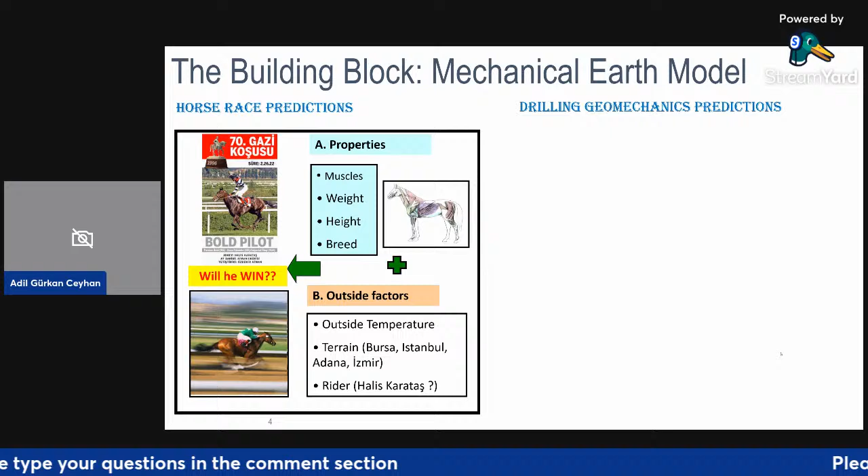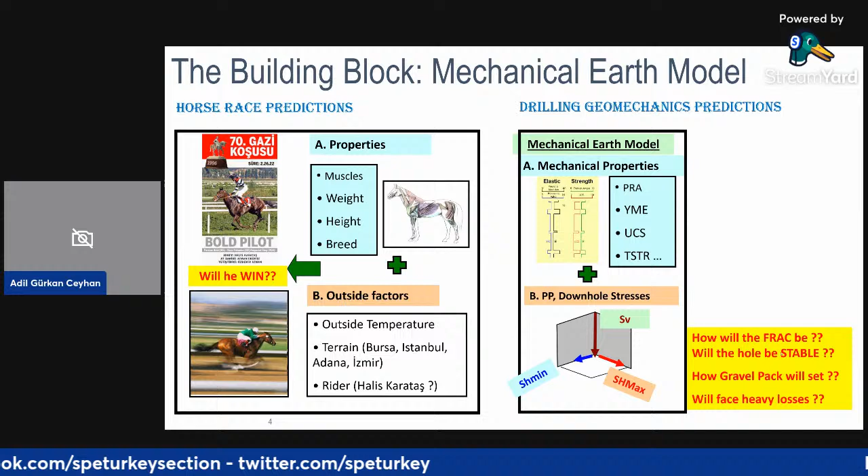First, we have to define the mechanical properties of a given well location, and of course we have outside factors such as pore pressure and downhole stresses like vertical stress and minimum and maximum horizontal stress. With that, once you have a complete mechanical earth model - this can be 1D - eventually we want to reach that 3D model. You can define the frac design, give guidance for the drillers, define a gravel pack operation, and give a heads up for potential loss locations before drilling commences.

So when you put it all together, there are several things that need to be considered for the mechanical earth model. Firstly, we have the critical input data such as wireline logs and the seismic cubes, and we must also have the core data as well as drilling information. When we talk about wireline logs, the critical ones are the acoustic or sonic logs, and density and porosity logs are also critical inputs.

And of course, when you want to define mechanical properties, you have to define the Young's modulus, Poisson's ratio, friction angles, and other parameters - I'll come to those details in coming slides. And of course you need to calibrate and model the vertical stress. There is a way you can also model SH min, the horizontal minimum stress, but there is no direct way to measure SH max, the horizontal maximum stress.

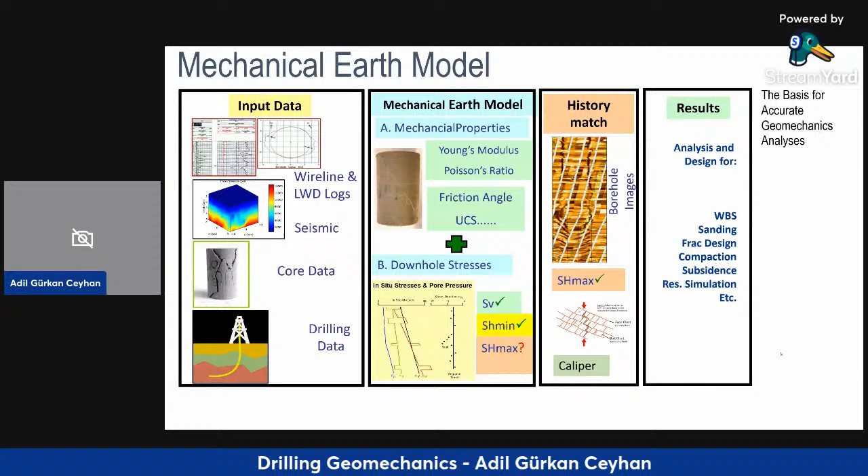But you can infer it from history matching of the caliper data, which today's software is capable of. You do the history match to understand SH max. Also, the direction of SH max is really critical, determined from image data and caliper information. Then, of course, you can design wellbore stability with this information. You can do sanding analysis, frac design, compaction, subsidence, and reservoir simulation - if you do coupled studies, this will be the critical input for those studies.

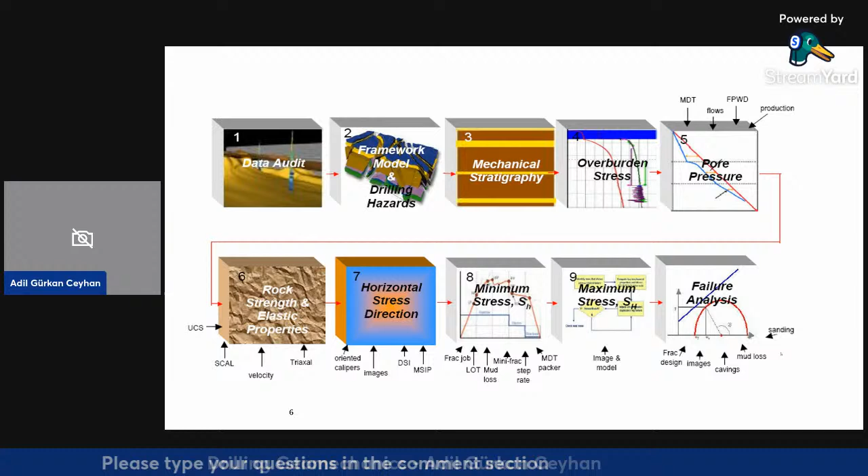So when we talk about 1D, a simple 1D mechanical model, first you start with the data audit. Then this data audit goes through a framework model to understand the geology and the potential drilling hazards if you have offset well studies, and then you start creating the mechanical stratigraphy based on this, and then from the offset well density logs you also create the overburden stress.

That's the first primary stress that we need to really get right first. If you don't get the overburden right, you have all sorts of complications. That's why every step has its own critical weight, but overburden stress is a must-have - it needs to be correct at the beginning. Then, of course, the pore pressure.

Today we are capable of measuring pore pressure in the drilled well. Also, while drilling we can take formation pressure tests as well. And if you have some flows happen during drilling, that gives you well control issues, but it also gives you pore pressure information. Of course, nearby well production also gives you an idea about the pore pressures.

Then you come up to the rock strength and elastic properties. So then you involve the uniaxial compressive strength and the triaxial core studies, and of course the velocity input, velocity inversions. Then you model your strength and elastic properties.

Then again, horizontal stress direction - as I mentioned earlier, oriented calipers, images, and acoustic data will help you understand stress azimuth, if there is any preference for the maximum stress direction.

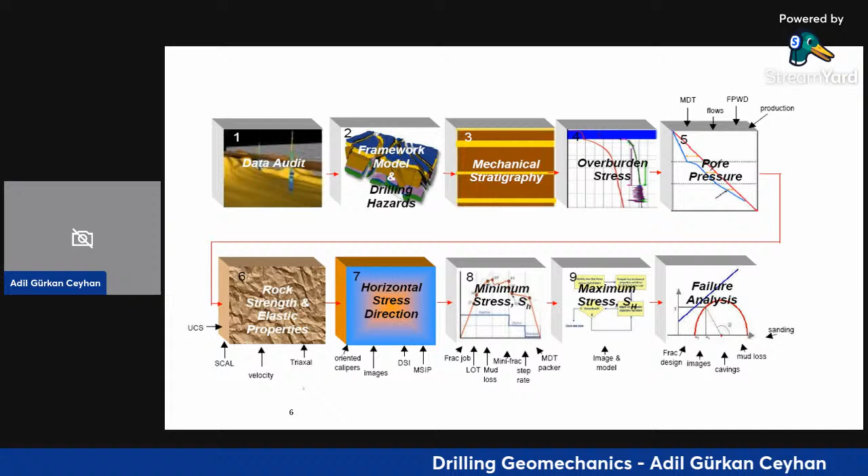Then you go back and do the Mohr-Coulomb type failure analysis, like cavings, mud losses, and if you have sanding information coming from nearby wells, you can also understand that to model the failure prediction for the environment. So as a small cartoon, it's from the 1D mechanical model generated.

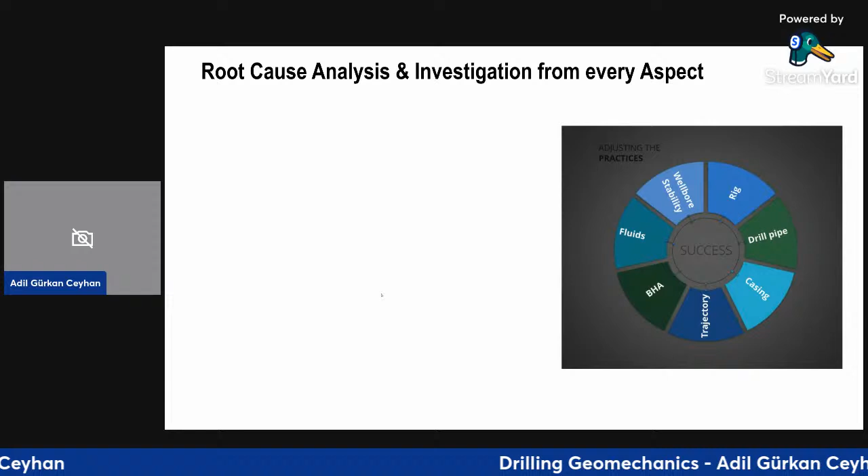So every aspect, of course, we talk about wellbore stability. There are things that sometimes you cannot control, or you can control if you plan in advance, like the rig type and drill pipe casings, trajectory, bottom hole assemblies, and of course the drilling fluids, right? Those are also the critical parts, to avoid having a washed out or badly washed out wellbore. So if you look at the root cause, there could be several of them, and it could be a mix.

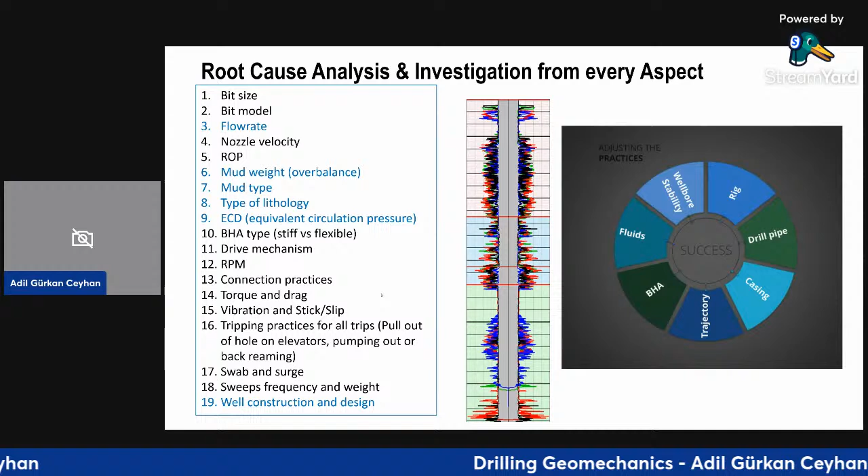So today, basically, we're going to focus on the overbalance and the type of lithology, and of course the ECD. But other things like selecting the bits, ROPs, and other types of drilling activities have a critical impact on drilling geomechanics, right?

So that's why, once you have these external factors which you cannot control directly, those could be on the left side, I just put it here. So what you need is a certain mindset, and some calculations and certain practices need to be involved in this type of analysis. Not only just the modeling with the software, but you also need to apply these practices, and see how you're going to collaborate with the field people, and also collaborate with the asset team at the same time.

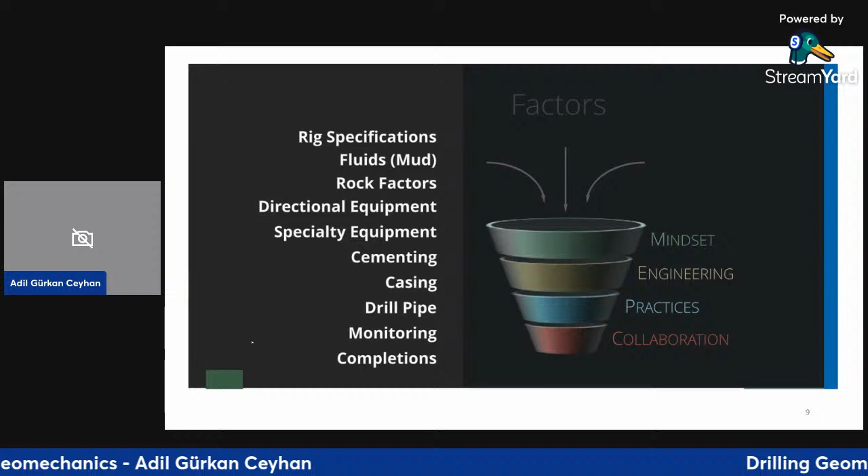So in a sense, the geomechanics engineers or geomechanics team, it's like the interface between the drilling and subsurface. So you make that interface.

But when you talk about measurement, it can be maybe, right? So always you talk about maybe. This brings up the maybe question always when you do the analysis. And of course, the question you should always ask yourself: okay, they have the KPI on shoe to shoe time targets, but how do you define the KPI for measurements? This is always something you need to think about.

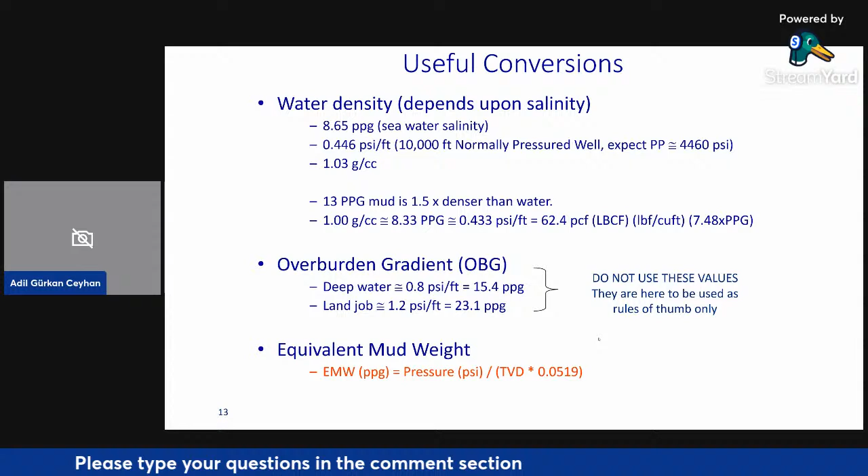And of course you can convert the equivalent mud weight always to pressure, which is simply you have the TVD and a multiplication factor of 0.052. As I mentioned, drillers like to always talk about equivalent mud weight when they refer to anything in the well. So since you're producing something on pressure, you always need to convert this into equivalent mud weight, which is either ppg or pcf.

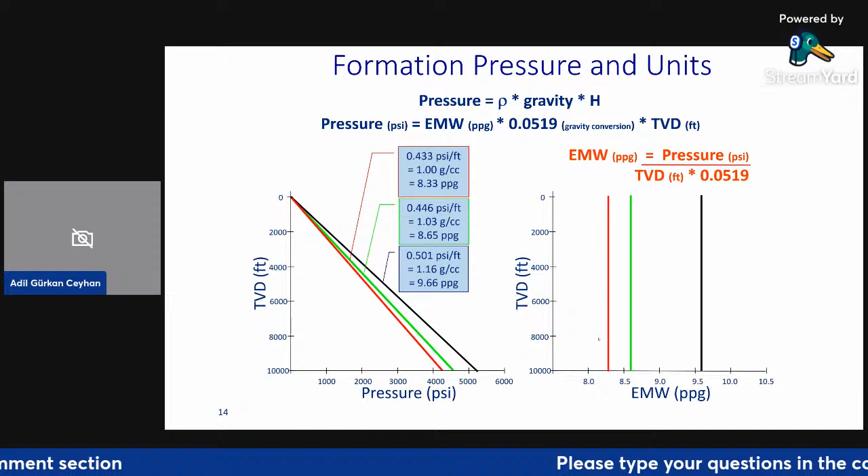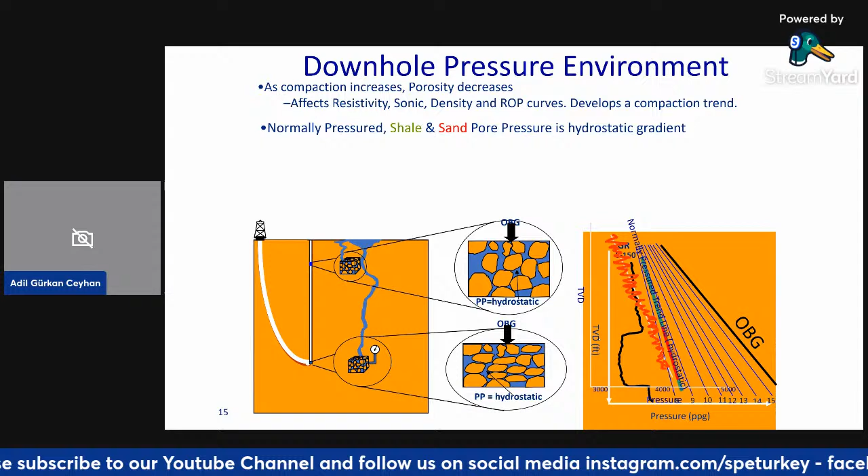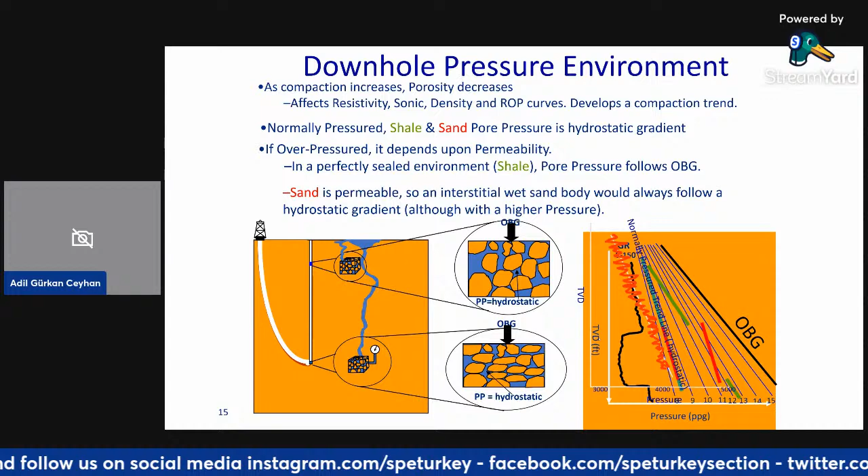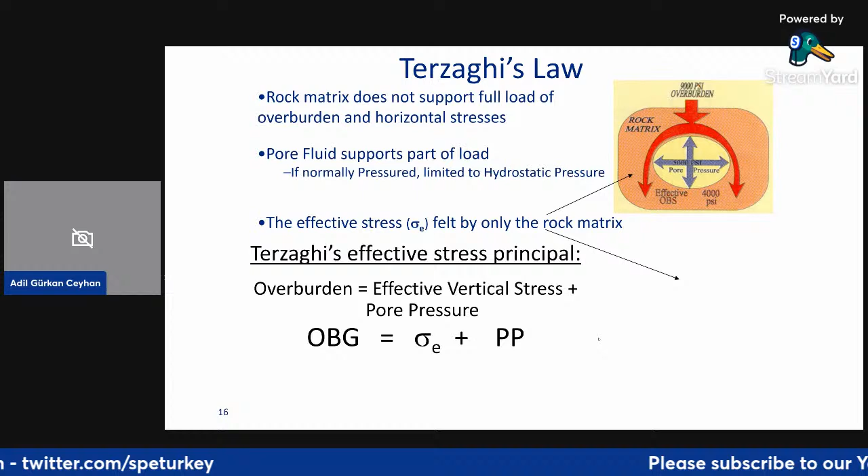But going back to the past, Terzaghi first really understood this. Terzaghi is an interesting character because he spent some time in Istanbul during the First World War as part of the deal with the Austro-Hungarian Empire and the Ottoman Empire. He also taught people in Istanbul Technical University as well as Bosphorus University at that time. But then he did some studies and understood that the rock matrix does not support the full load of overburden and horizontal stress.

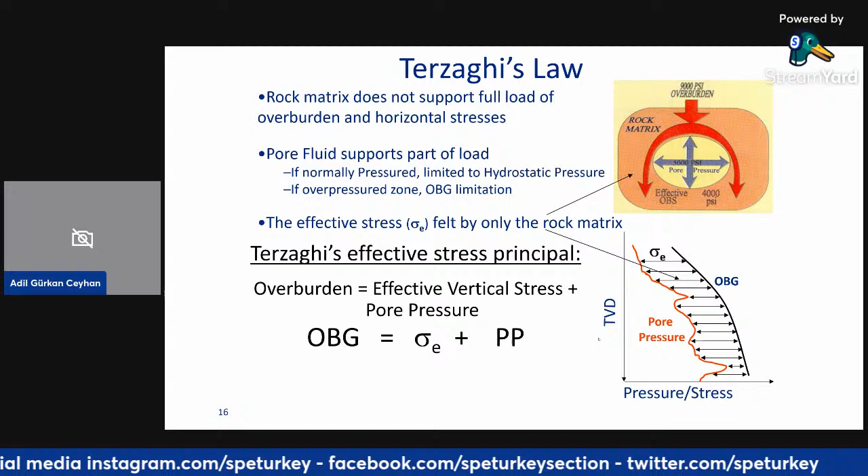It calibrates with itself as the effective stress. So basically you have the overburden gradient, but the rock itself only feels the effective stress, which is overburden minus the pore pressure. Any pore pressure method developed afterwards, like Eaton or Bowers, is basically simply trying to find that effective stress term. Once you know your overburden gradient, you can simply subtract, and then obtain the pore pressure trends.

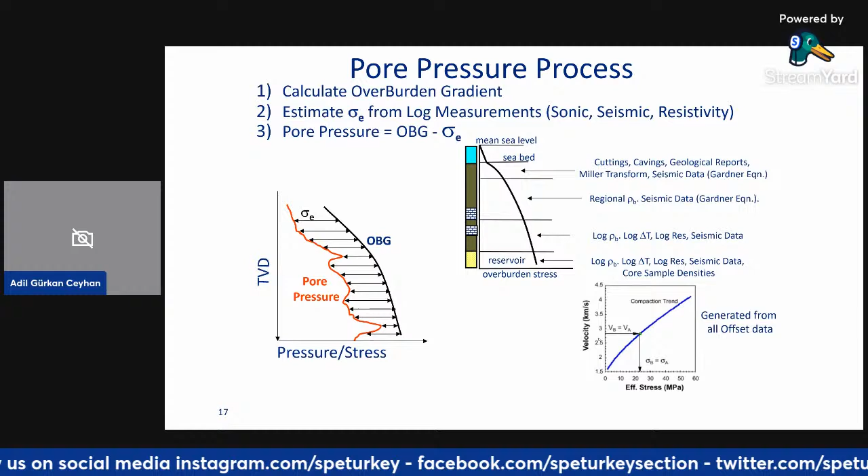Again, the first step is you need to get the overburden gradient - this is very important. We call it S vertical, sometimes overburden gradient. You can do this with density logs, with some seismic as well. There are correlations available, and you can estimate based on given locations with changes in velocity. You can see if the trend is changing, especially on a logarithmic scale, the slowness, which we call DTCO, sonic slowness. You can calibrate this and estimate the changes in effective stress, and then simply start assuming your pore pressure.

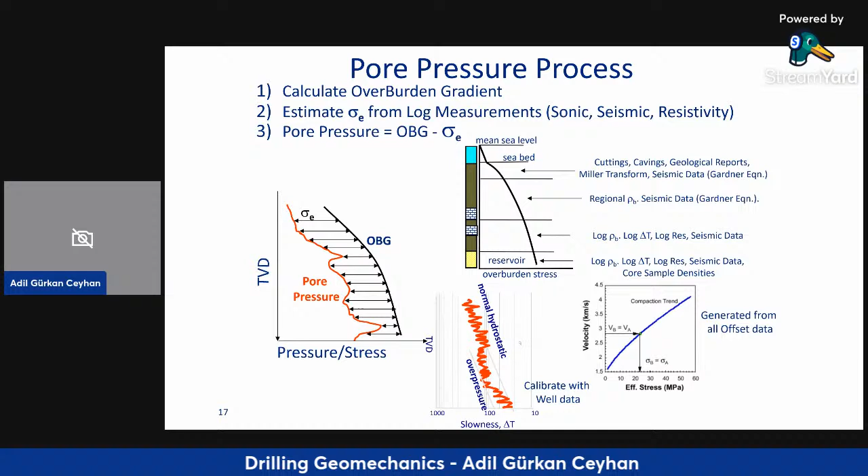So basically, if you have normal compaction trends, porosity starts at the surface around 50%, and with the normal compaction trend, the porosity decreases. Normally, if you have a single compaction line, your life is easy. You can make easy correlations.

But if multiple compaction lines come into play, pore pressure modeling becomes rather complicated, and sometimes really difficult. That's why you need additional measurements, especially if you are dealing with a wildcat in offshore.

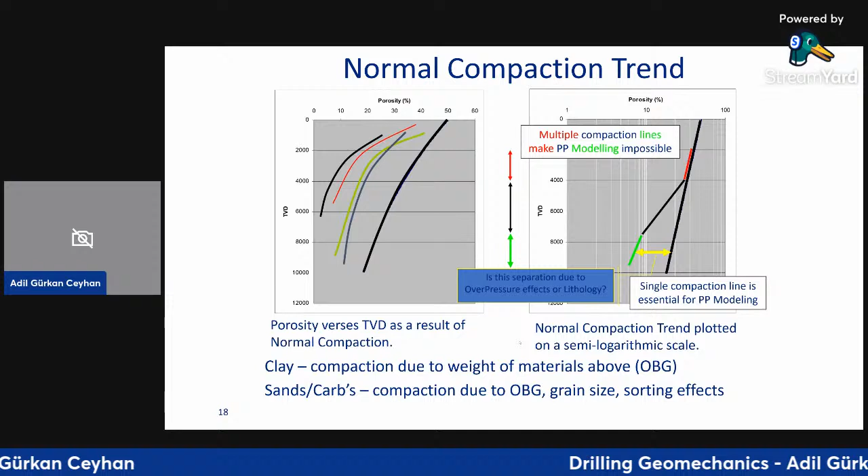So let's go back and check based on porosity change, overpressure related to porosity, we have normal pressure with the normal trend line. Of course, we have faster deposition, and pressure doesn't have enough time to equilibrate with the above and below, so the porosity stays and creates an overpressure region.

And if you look at the other logs, this can be a porosity log if you are measuring, or as I mentioned earlier, slowness with delta T, or resistivity logs - you can also do those effects.

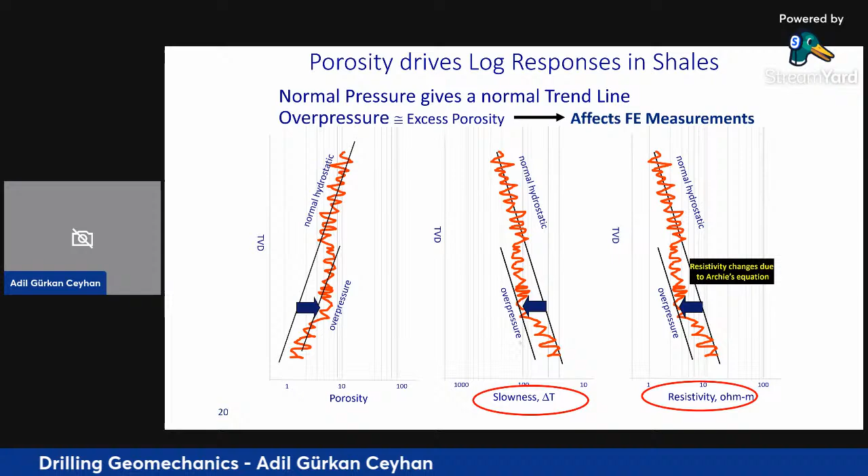Of course, you need to understand that you are only applying this across the shale, because the trend application on the sand, if you are going through the sand, it doesn't really work. So make sure you really understand that trend change over the shale intervals.

And also what drillers do, they have the D-exponent values. They utilize ROP, RPM, weight on bit, and bit size. A change in trend gives you the anomaly that you are potentially going through a pressure ramp.

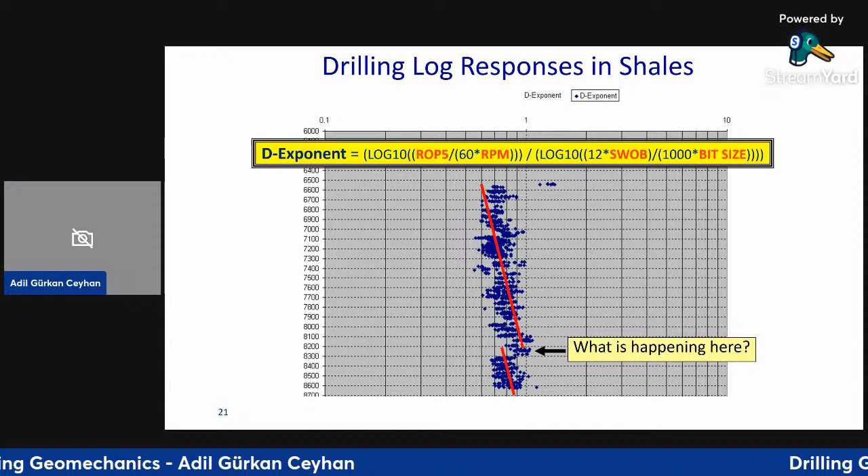But again, this is developed for the roller cone bits. It doesn't really apply to the diamond bits that you are using now commonly in almost all environments. But this is an option again - try to utilize it with the drilling parameters.

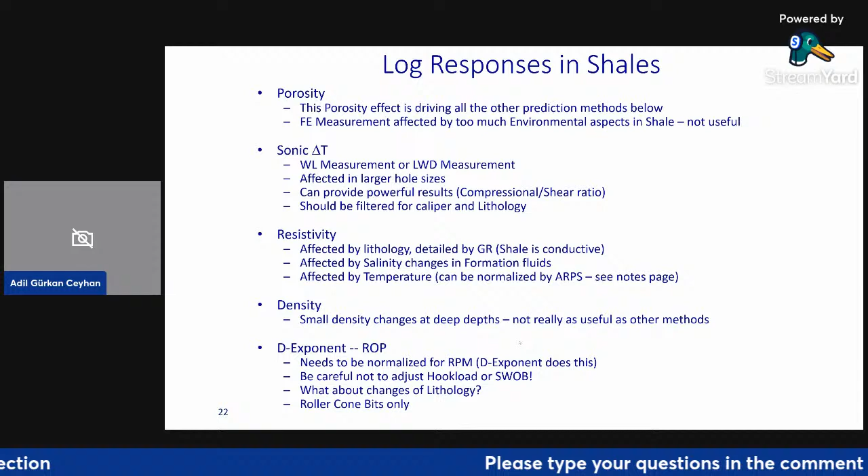Simply we have the porosity methods, the sonic methods, resistivity, density, and then mentioned the D-exponent. But the most effective one is becoming the sonic delta T, which you can easily correlate and is rather not affected by lithology. You can see the sonic trends and do pressure estimates based on sonic data. So today we are utilizing this mainly in offshore with real-time LWD information.

So when it comes to vertical stress, as I earlier mentioned, it's very critical. You are in offshore, you have a certain density log measured on a certain interval, but then from the mud line, the bottom of the sea, up to the sea level, you need to assume something.

So normally there are correlations, you do extrapolation, but this gives you question marks if there is a heterogeneous environment in that overburden interval - it complicates the S vertical calculation. But if you don't have anything else, you need to do this extrapolation and use this as the overburden gradient for your calculations.

And for modeling horizontal stress, we have an empirical correlation that's been developed mainly for the Gulf of Mexico, that is now used and also published in so many different books and papers.

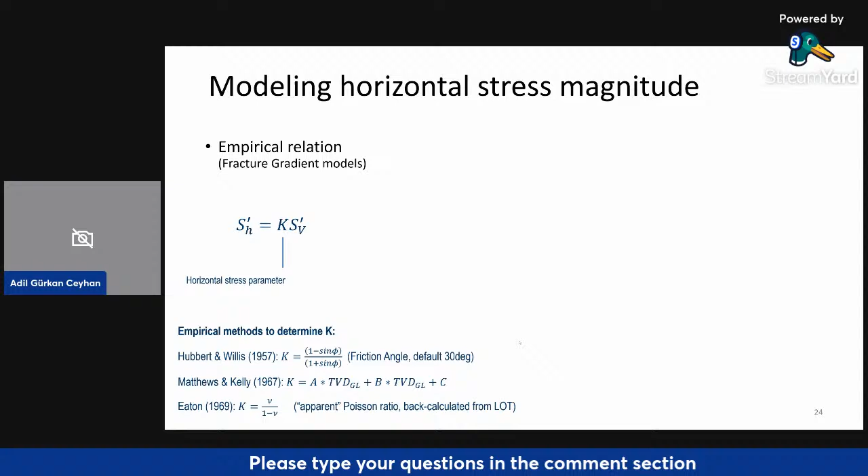Then they relate the effective SH min and effective S vertical with the K factor. That empirical method's K factor has also been slightly modified over the years. And lately, they also find the relation with the Poisson ratio, which I will explain in a bit, and back calculate from the leak-off tests.

And simply we have Hooke's law again. This is a bit of a later application, but today software is capable of utilizing the tectonic strain parameters, which is the epsilon parameters. That's what we are utilizing to understand SH min, SH max when you calibrate with caliper and other information, along with leak-off tests.

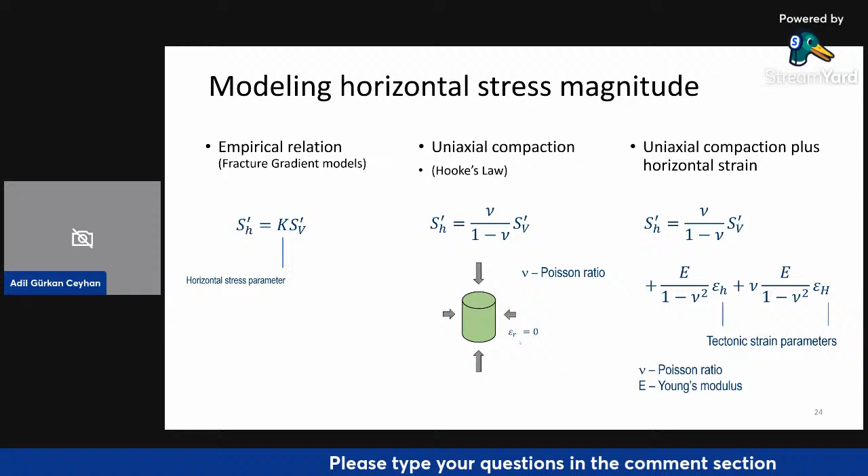Of course, here we need to define Poisson ratio and Young's modulus. What are those? Simply, those are the elastic properties. I'm sure you've heard about this several times. But what are these? Poisson ratio is basically the measure of lateral expansion versus longitudinal contraction.

A very good example is a bottle cork. So guess what - when you're opening that bottle, you are applying pressure from both sides, but there you don't see longitudinal contraction.

Then of course, you can refer that cork has a Poisson ratio of almost zero. This is a dimensionless parameter. It can be from 0.1 to 0.5 for rocks, but cork is one of the good examples.

Young modulus is the ratio of applied stress and the resultant strain in the same direction. It can be thought of as the stiffness of the rock. Of course, Young modulus we can calculate from the logs, and we can also measure in the lab, which I will come to in a bit. But once you calculate from the logs, you get the dynamic parameters, and you have to convert this to static. That's why when I refer to YME_STA, it means Young modulus static, Poisson ratio static. Those go into your calculations for understanding the stress.

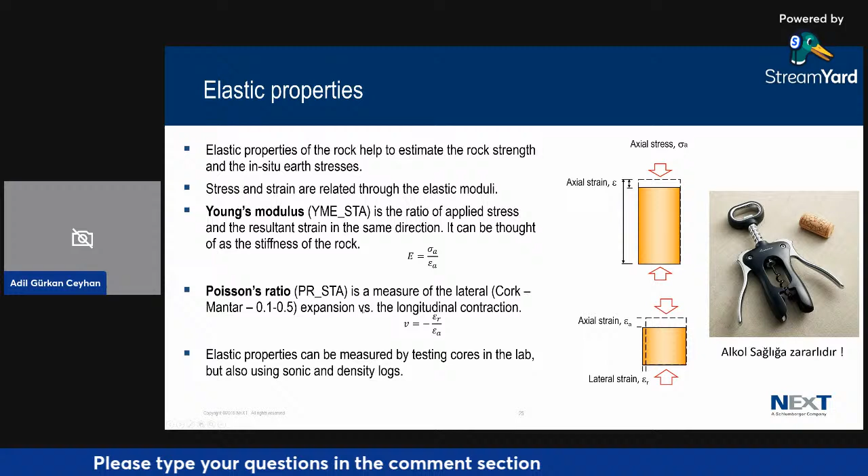Let's look at some examples, the pore pressure and the fracture gradient cases.

One of the things is that we are mainly dealing with primary under compaction and simple tectonics, but you also need to think about secondary trap mechanisms, clay diagenesis, hydrocarbon maturation, and charging from several sites. Also laterals, up-dip reservoir pressure, lateral transfer creates the secondary mechanism. To understand those is not that easy with simple 1D velocity models. But still, with the primary under compaction disequilibrium, you can understand that from 1D models and 1D approaches.

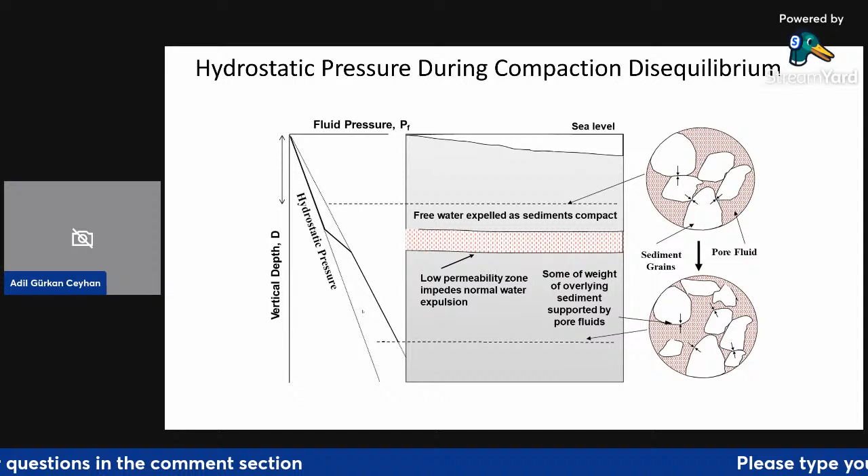Just to add, when you have the hydrostatic pressure during compaction disequilibrium, you have the normal hydrostatic pressure gradient with the relation to vertical depth, TVD. If you have a low permeability barrier, as I mentioned earlier, then with the compaction, speed exceeds that pressure equilibrium and it doesn't equilibrate above and below, and then you end up having some high pressure trend below that impermeable barrier. So this creates the importance of clays.

Clay bearing sediment makes up roughly 80% of the geological column. Today, if you look at the Black Sea, the majority of that is really filled with clays. Understanding clays in terms of seal or maybe source rock, and also compaction trends, diagenesis, serve as one of the critical inputs for understanding abnormal pore pressure. Again, clay properties, clay modeling across that region, is very critical to understand how the basin behaves with the pore pressure.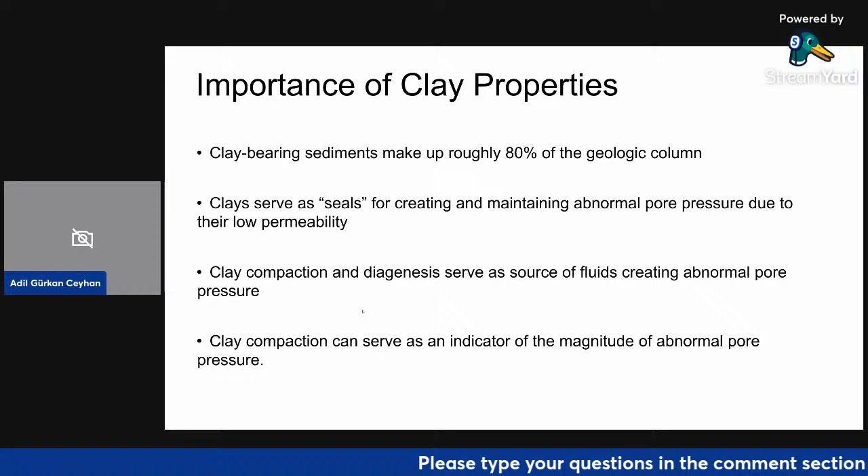Moving on, relative stress magnitudes, we have three types of faulting. As you know, especially with a geology background, we have normal faulting, strike slip, and thrust faulting. When you talk about the North Anatolian fault, or Anadolu in general, or the Adıyaman, Batman region, and in a sense maybe a portion of the Akdeniz basin, you have that very faulted area, and really strike slip tendency controls the trends. But when you come to the Black Sea, you are far away from all the tectonic activities. Then you are really on a normal faulting regime, where S vertical is the primary, the highest stress.

So as I mentioned earlier, horizontal stress cannot be evaluated directly. You need to do a leak-off test to understand the trends. What the leak-off test actually is: you drill a fresh formation after setting a casing. This could be 3 to 4 meters. Then you start pressurizing the wellbore from the top with casing plus the freshly drilled formation.

Then first you reach what we call FIT, the first gradual point. This is what we call the formation integrity test. So if you're not sure that your formation is going to behave and give you a good rate, you can also stop here with the FIT. But if you want to continue to understand the leak off area, then this starts to deviate. Of course, you are plotting pressure versus volume, not pressure versus time, to get everything right, and to normalize for other effects.

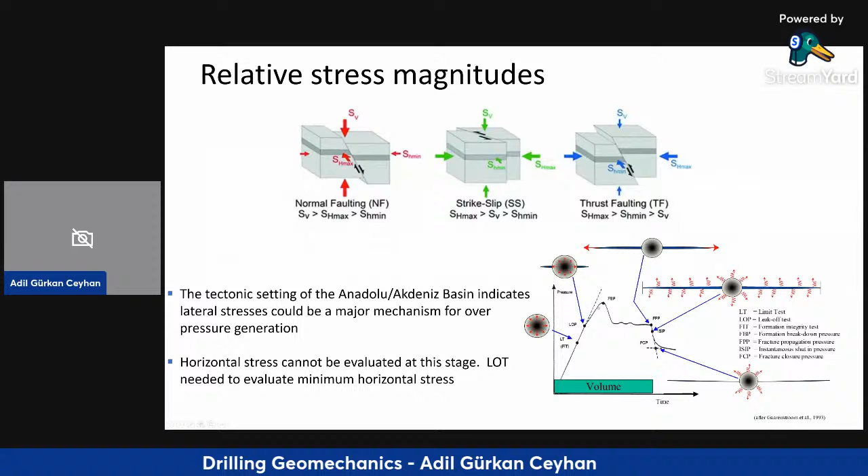So basically, normally we do this with the mini frac operation. But for the casing, we normally leave it at the leak off trend. Once you see the leak off, then you stop, and you know your leak off trend.

So with the petrophysical response, we have resistivity, which will give an anomaly if you pass through an overpressure trend, and it will change direction. Of course, normally what we have here with the seismic input is the vertical velocity profile, given in meter per second. You can also convert this to 1 over velocity to get delta t, which you can use easily in microsecond over feet. This is basically when you do logs, we get this log with the acoustic tools, and you have also the trend at the same time. Then if you have density measurements, similarly, the density also creates that anomaly with the overpressure trend.

So let's look at an example. This is Well A. It's a wildcat, with offsets maybe at a distance of 60 to 70 kilometers offshore. We've given velocity profiles that could be high and low. There are two curves, but just look at this: with the high curve, we divided it into A, B, C, and D, and this is the expected lithology column.

So here A is velocity increase with depth, which is normal pressure expected. B is velocity constant with depth, a perfect seal condition, increasing at the same rate. So we expect the pore pressure will increase here on B at the same rate as the overburden, since we are only in the clay, not exposed to the sands.

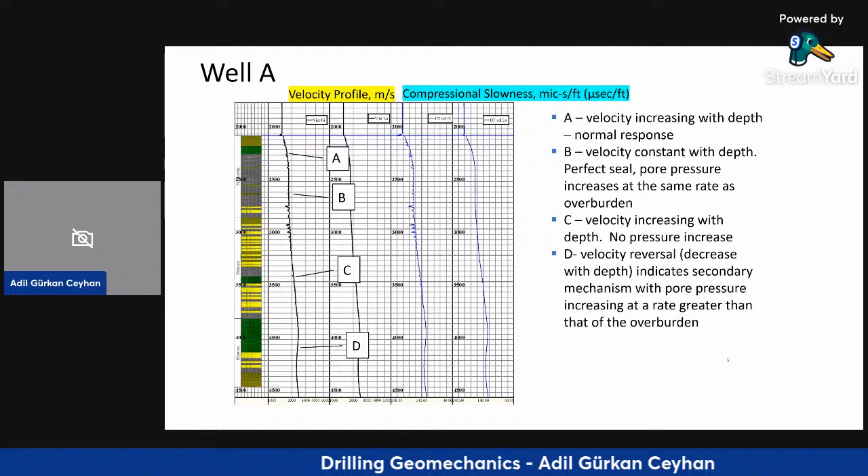Then on D, of course, you see a velocity reversal. So any velocity reversal you see from the seismic gives you a hint that you might be indicating that secondary mechanism with the pore pressure, which might indicate some relative pore pressure increase.

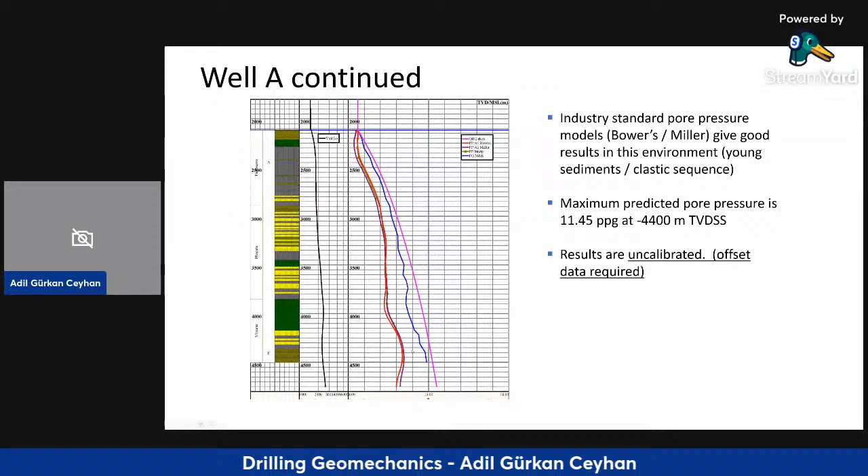So moving on, with some engineering judgment, you do this and create that pore pressure model. First you do your overburden gradient, shown here in pink, and the blue is the frac gradient, which comes from the Matthews and Kelly approach. Then you have two curves here, minimum and maximum pore pressure curve you can obtain, and then you define the mud weight window.

Then, of course, one of the other critical inputs is the temperature. You need to take into consideration that temperature also has an impact if you have clay types like smectite and illite diagenesis, especially expected in the C region. Then some of the density and sonic acoustic logs will also give you an idea while drilling those formations.

So you include this also into the modeling, and you create your pore pressure window. As you can see here, it's a rather narrow drilling window, typical of a geopressured offshore well. There's one section here where you have maybe a single casing, but in several areas it's a question mark whether you can cross with maybe 1, 2, 3, 4, 5, 6 casing strings, or maybe use managed pressure drilling, which is maybe another subject for upcoming meetings. So here, it's a rather complicated well to drill, especially after this interval.

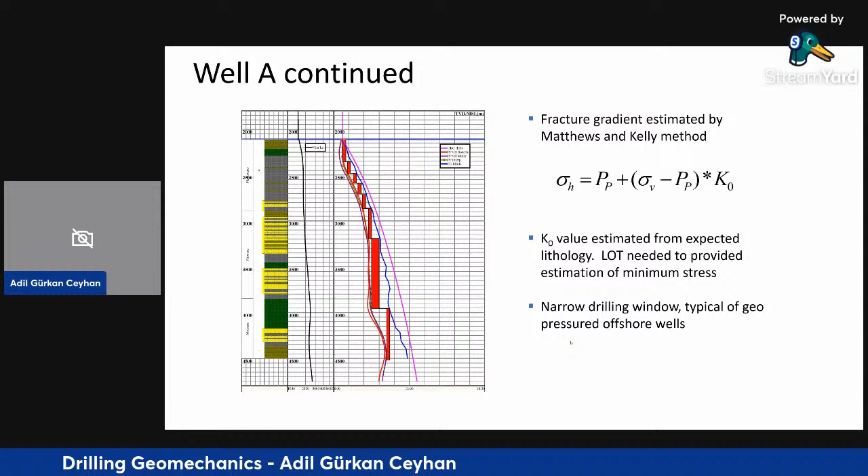Then below this, you have the 2 casing intervals, and you can complete this well. Again, here the minimum stress has been calculated based on correlations, since there are no logs available to calculate the Young's modulus and Poisson ratio. But there are cases where you might have that.

Same data set and it gives you 3 different outputs. Like here, this can easily give you an easy well to drill, to design the casing, or a challenging, or totally undrillable result, based on the assumptions you're using for the Eaton exponent. So that's why regional understanding and offset wells are critical.

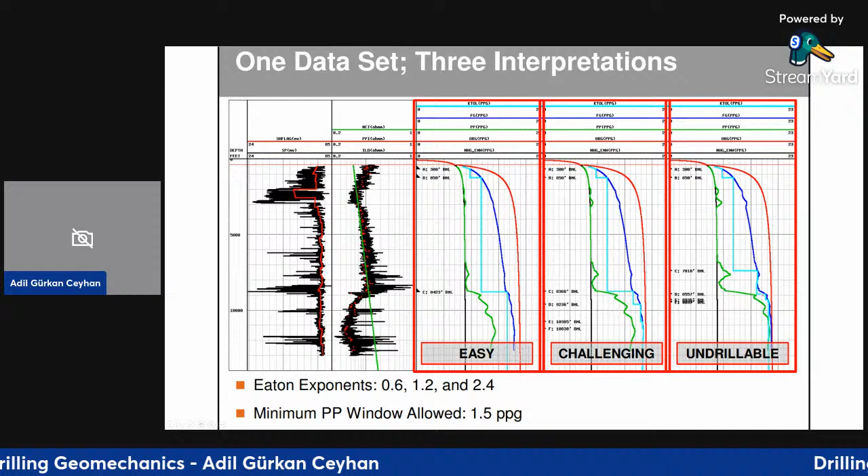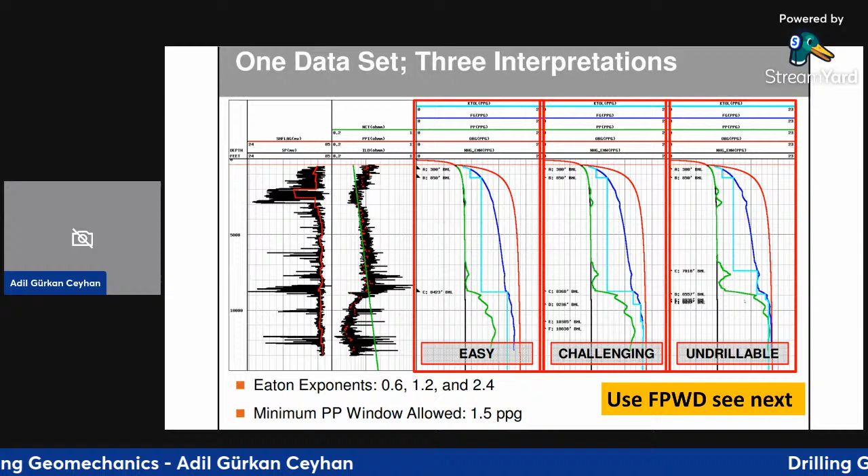So here, what you do, of course, if you have such a well where standard logs don't help you, then maybe you can utilize formation pressure while drilling to commence this operation. Then you can identify your pore pressure trends. I'll come and explain this FPWD in a bit also.

Just to the last slide - once you do pore pressure prediction, you are basically calibrating that model. I would say you are torturing the data, and some of those calibrations might really mislead you. That's why, especially for offshore drilling, when you do the models you have critical inputs from third parties. You work with several parties to define probable and good cases that you can model, for instance casing design for a deep water well.

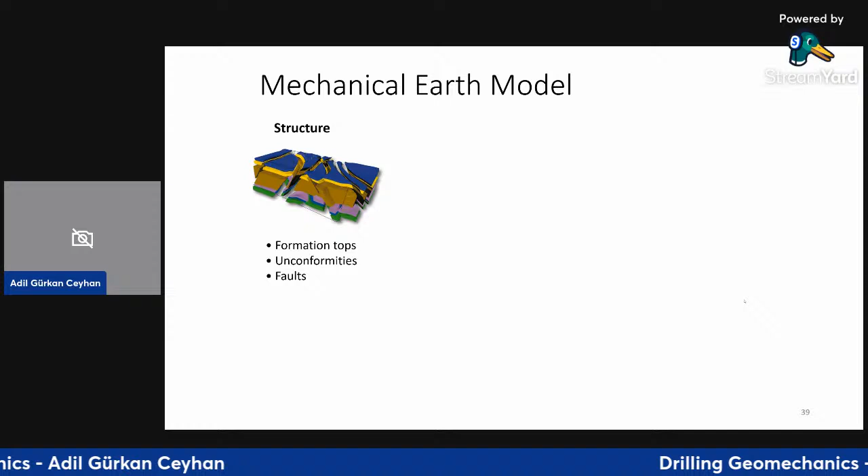Now let's look at wellbore stability after the pore pressure models. As I mentioned earlier, first we need formation tops, unconformities and faults with structural analysis. Then this goes to mechanical stratigraphy, where we do rock fabric mechanical supports and model selection. Then we come to Young's modulus, Poisson's ratio, friction angle, UCS, and stress calibration and stress direction, which completes the rock mechanical models.

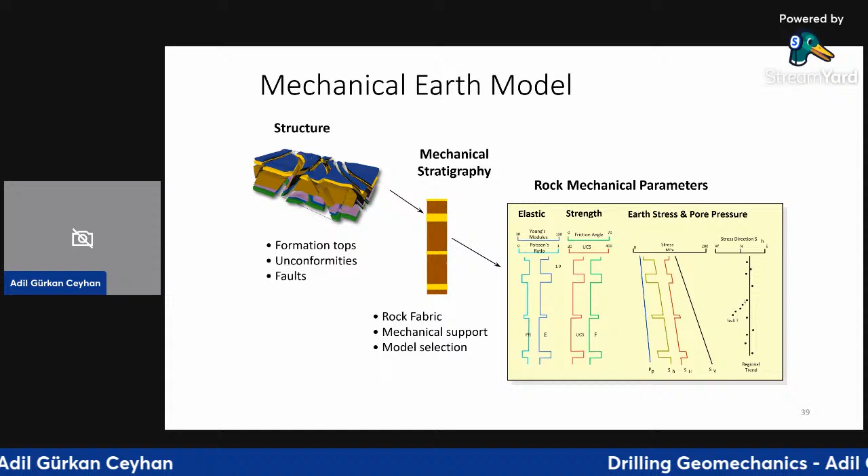With the 1D Earth model, vertical stress is critical, and then you need to reach minimum and maximum horizontal stress, pore pressure, rock strength, and friction angle again - those are the key parameters. You drive this versus true vertical depth.

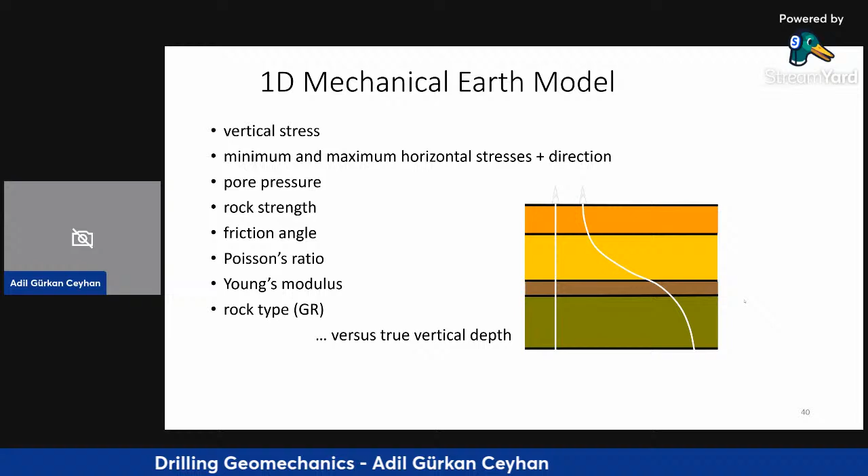When you do 2D mechanical models, you can include faults and structural dips. You can include these, but the stress is still not really equilibrated - you can allow that stress gradient to change laterally, and try to see that impact on the 2D mechanical earth models.

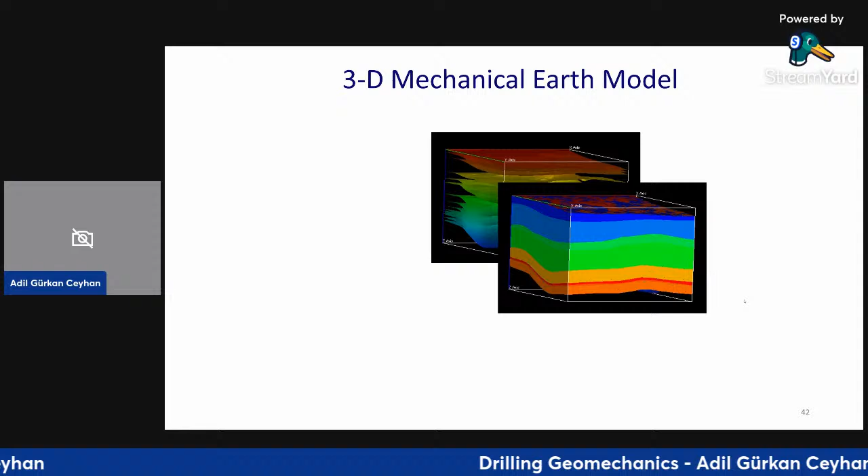But of course your ultimate goal is to reach 3D mechanical earth models. First you start with surfaces, then you have to fill the surfaces between with volume, then model the rock fabric in that volume. You may need some rock tests or additional logs once you add that model. Then you do the meshing, and try to reach that finite element approach for the 3D mechanical earth model - in this case fully equilibrated with the stress state.

Today there are several third-party softwares like Petrel Visage, Jewel, Gohfer, Elfen, FLAC 3D, used in the oil industry. They can utilize these approaches once they do the 3D models.

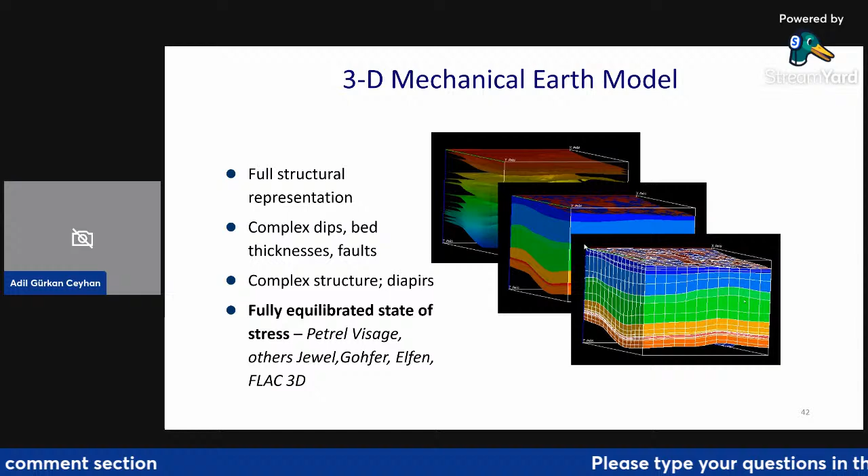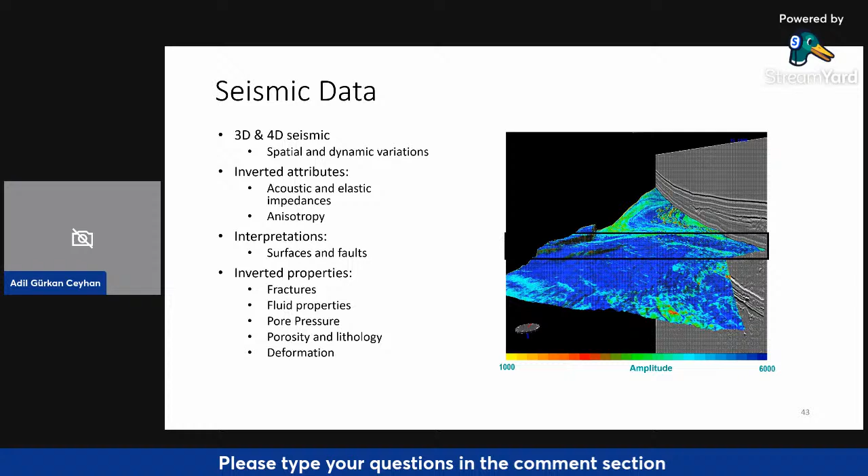And you don't really stop with the 3D. Once you move to production, especially in the North Sea - I was working there - that 4D seismic becomes really critical, trying to see the spatial and dynamic variation over time due to production. That also becomes one of the key inputs. So eventually, for the future offshore in Turkey, the 4D will definitely become a critical tool for us.

Cores and logs are really critical to get the mechanical properties and then produce them in a continuous format. And of course you have the sonic logs, the images, and the wireline formation testers.

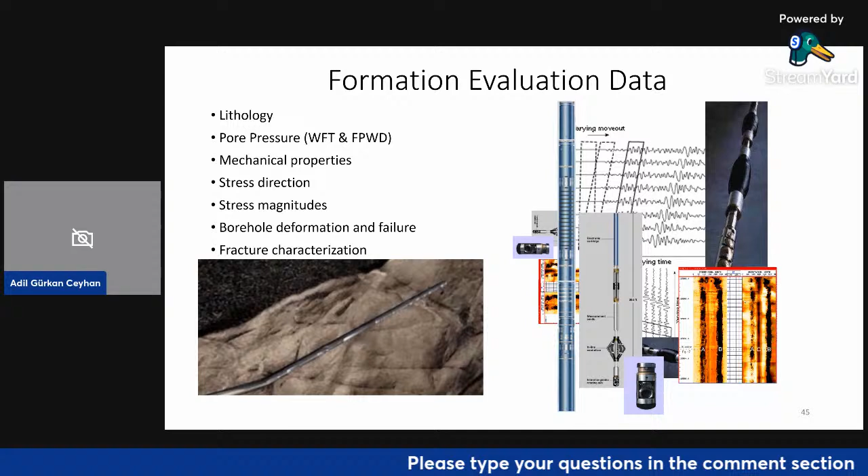On the left side, what we commonly use offshore Turkey as a formation tester is what we call Saturn, or the 3D probe. There are 4 probes, about 19 centimeters each. This can also be done in LWD - it's been used in the past in Turkey as well, and heavily in the North Sea and other offshore environments. There's also a probe-type tool, not like a single packer type - you can measure pressure, and lately also take samples, which was the technology I worked on back in my previous career.

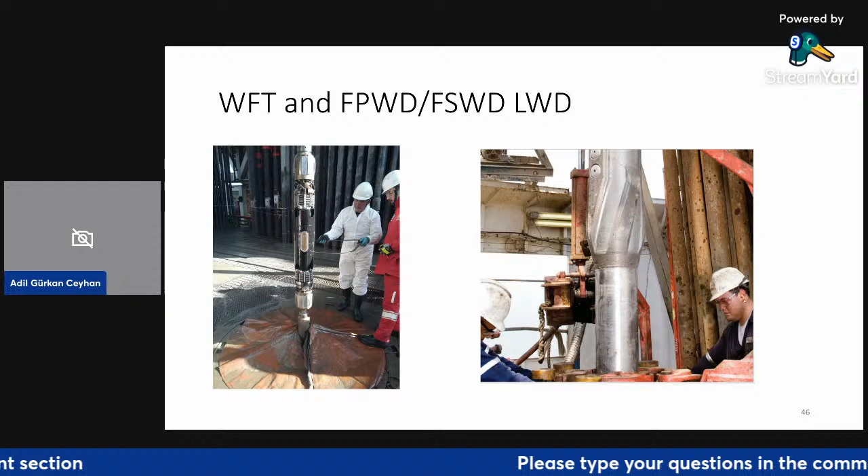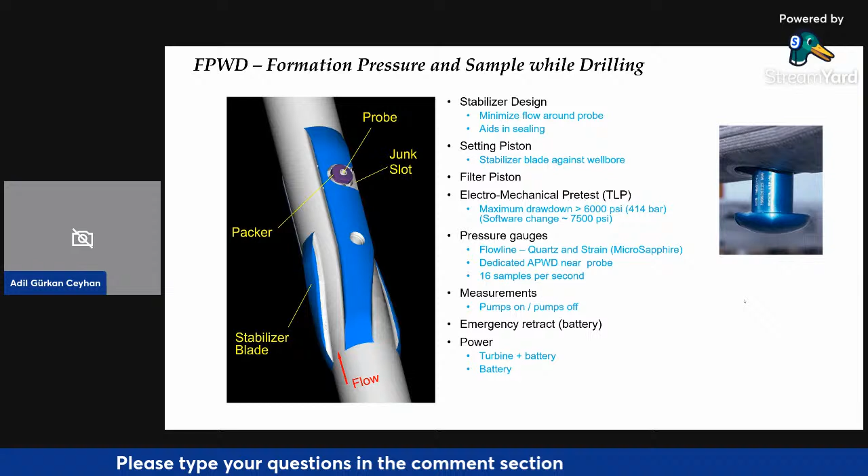On the pressure while drilling tool, there is a probe. You are circulating at the same time, and then you have to stop, and the gauges become available - similar to the gauges on wireline formation testers, like the MDT we use today. The data, when you get that real-time data, we are using mud-pulse telemetry.

I'm not sure you really know the fundamentals. You are using an MWD tool, part of the BHA, and that pulses mud and produces the binary system 1010. That itself is maybe another discussion and speech topic, maybe we can do this later.

So of course you get certain data frames, but once you bring the tool to surface, you get the memory data versus the real-time data. The good thing is they are on top of each other, because there's a certain algorithm running in the tool that gives you the final reach pressure buildups. You see the pressure has been repeated several times to make sure we are measuring the correct pressure. So here we have the hydrostatic.

This is our overbalance, right? From here, this is the mud pressure, here in bar scale. This comes from the North Sea, about 305 bar, and formation about 220 bar. So here is 80 bar overbalance, but then this is the drawdown, right? This gives you an idea about your mobility or drawdown mobility, if you are familiar.

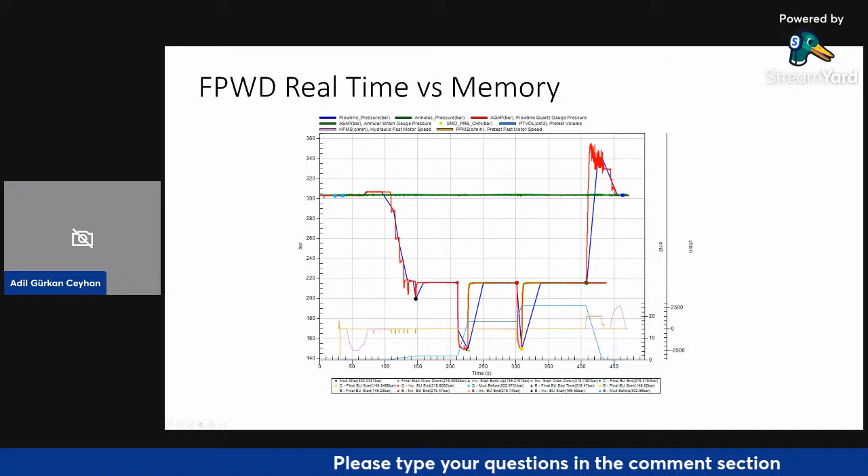Moving on, then it comes to real-time drilling and well information, which is really important. I have about 10 minutes, so I'm concluding soon. Try to understand the mud weight window, as I mentioned earlier. We used to do this in Saudi, create the drilling quality indicator that gives a heads up to the drillers where you're going to expect some potential mud weight increase, where you're going to expect some potential packoffs and cavings. This is what we used to create for the horizontal wells.

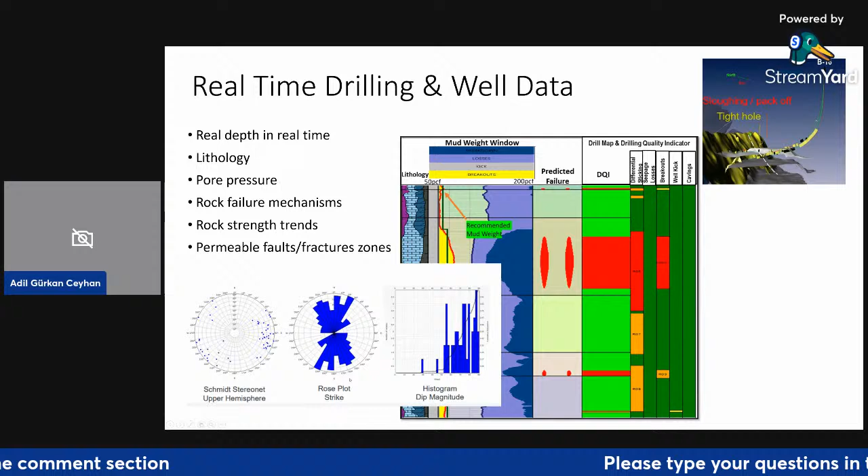Then, to be able to cross a fractured zone, this is also what we are applying in Turkey in horizontal wells. You need to cross as many fractures as you can, then you have to drill towards the minimum stress. While drilling with the LWD tools, you can measure the images and the fracture network, and create a rose plot. It gives you the maximum stress direction. Here in this case, 330, 320 is the north direction. This is the maximum stress direction in the Adıyaman area.

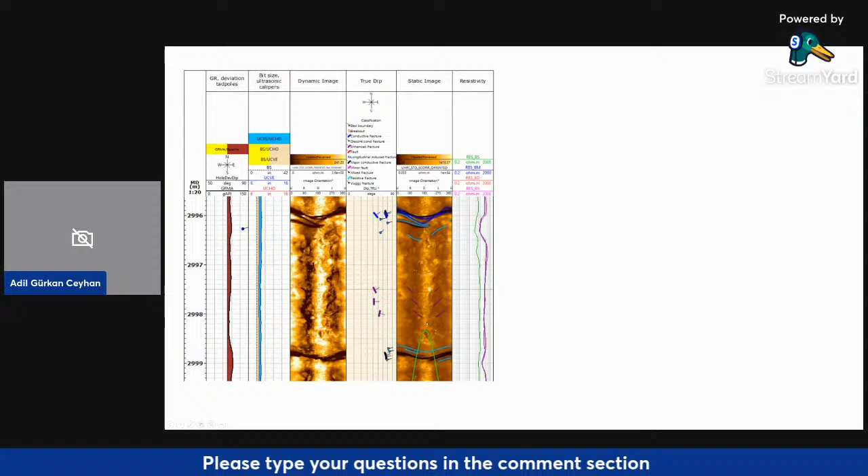Just to show you one brief example, this is a drilled horizontal well with images acquired while drilling in the Adıyaman area. Again, you see there are some breakouts here because we are drilling towards the minimum stress. These are the fracture corridors, fracture mapping is mapped. You see that every meter you have 4 or 5 fractures crossing the horizontal wellbore.

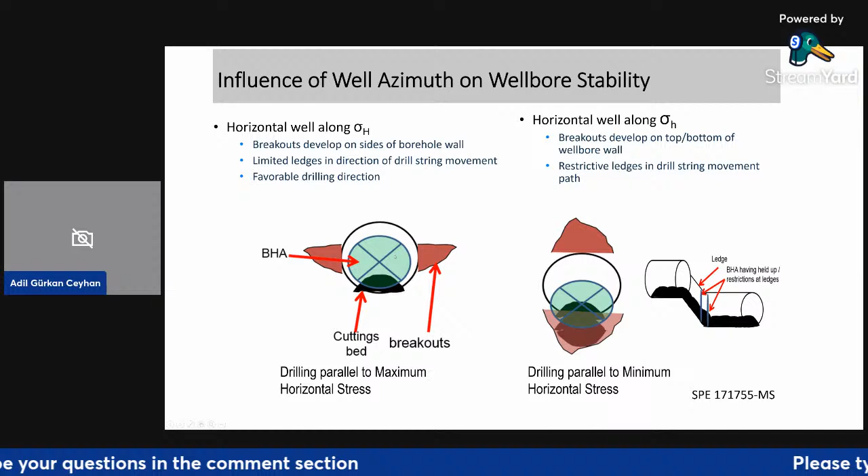Again, as mentioned earlier, you can create that plot. One thing, when drilling towards the minimum stress, you create a breakout above and below the formation, to be able to cut through this fracture network. Having this type of wellbore creates a problem with wellbore stability, but you need to sacrifice the wellbore conditions sometimes to get maximum fracture cut through. But if you drill towards the maximum stress direction instead, you create washouts on side by side of the horizontal well.

Just a brief summary to conclude. The mechanical model: you have fluid information, mechanical properties like Young's modulus, Poisson ratio, friction angle, UCS, and rock stress, which comes from the leak-off tests. Pressure can be obtained from the MDT, RFT, and mud logging also gives you an idea if you have some increasing gas trend, which gives you an idea about pore pressure. Those are the ways it completes the circle.

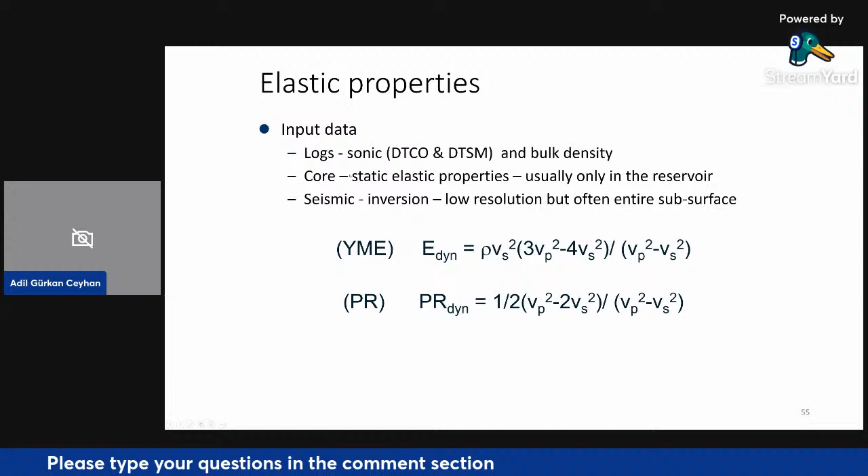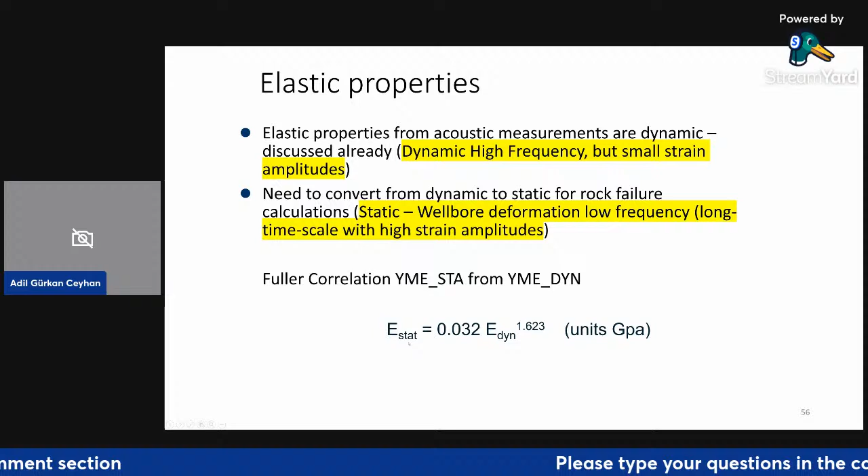Just to give you the reference, you have the log measuring the DTCO, compression and shear, and bulk density. This is how you calculate Young's modulus and Poisson ratio. Again, these need to be calibrated because these are all dynamic measurements. The logs we acquire are high frequency but with small strain amplitudes, but the deformation on the static condition happens at low frequency, a long time scale with high strain amplitudes. So every dynamic elastic property needs to be calibrated with core data, converted into static information. If you don't have core, you have to use some correlations given by the software.

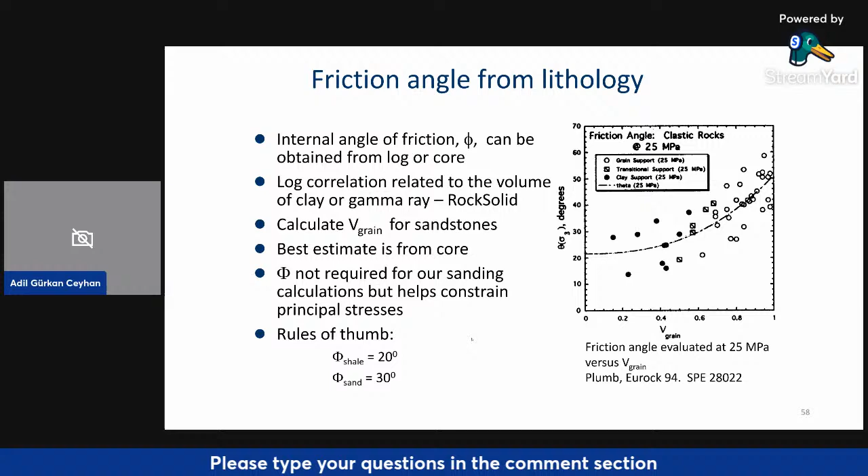Similarly, the uniaxial compressive strength has a correlation. If you don't have core data, you can use Young's modulus static correlations to calculate UCS values. Friction angle, similarly, is best obtained from core measurements. If you don't have that, there are correlations based on gamma ray logs and spectral gamma ray logs, with certain numbers for shale and sand, so you can estimate the internal friction angle from lithology.

So what are the commonly observed deformation mechanisms? Shear, tensile failure, natural fractures, and laminated rocks, bedding parallel wellbore, fault activation, and spalling. Those are the things that drillers don't want to see while drilling. Of course, it sometimes happens, and then you get losses, or you get stuck, you get problems.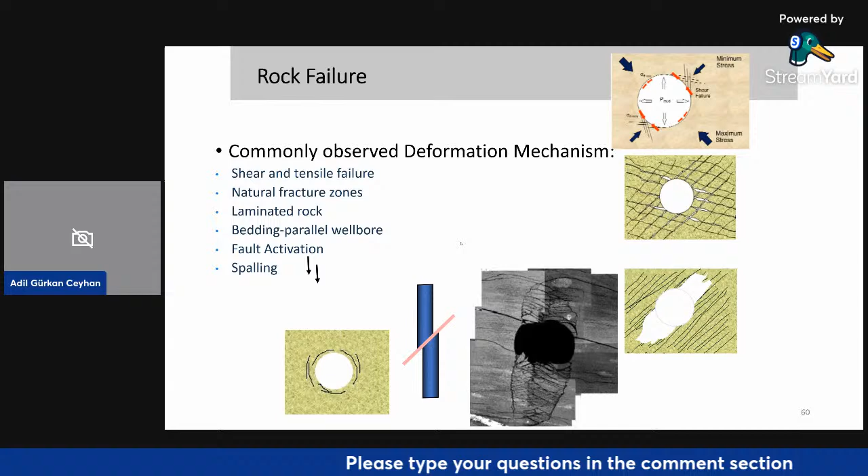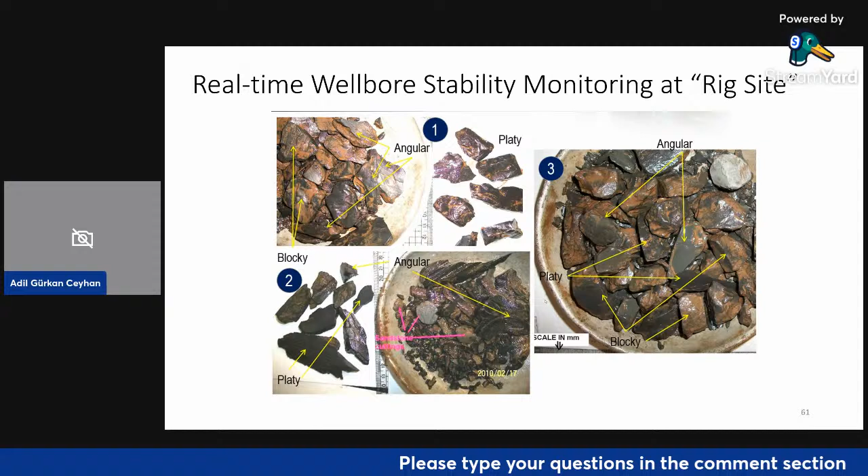While drilling, receiving the cuttings to surface and rig-site collaboration is critical. The type of cuttings you are receiving, blocky or angular, gives you an idea of what type of environment you are in, whether you are near-balance or under-balance conditions. You can also get an idea from the cuttings.

If you're receiving splintery cavings, that means you're having tensile failure, you're really getting the breakouts, and you are exceeding conditions where the mud weight is below the pore pressure, which means you need to increase the mud weight in this case.

With angular cavings, if you have shear failure, you start seeing this with the breakouts. Then you need to make some changes and maintain hole cleaning and other things while drilling. If you are receiving a mix of these, you're maybe going through unpredictable zones, which means you need to keep an eye on all the drilling parameters and maintain the mud weight.

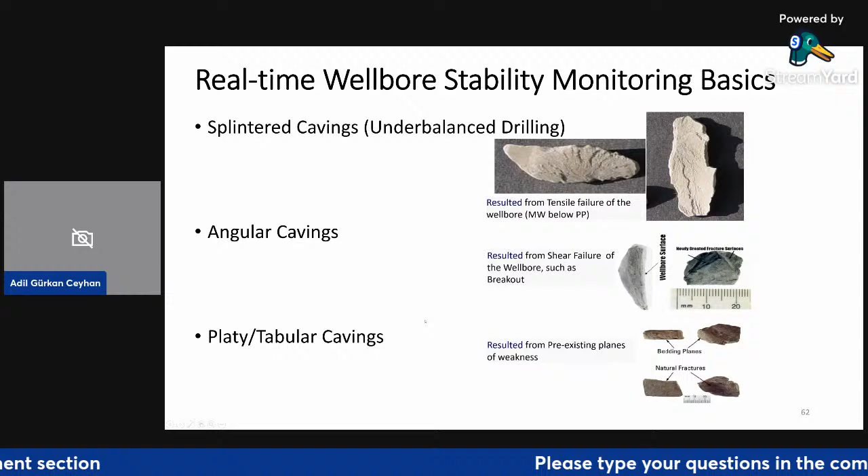Also, due to time exposure, especially if you're dealing with water-based mud and a shale-sand sequence with poor inhibition, you get loading near the wellbore, which creates swelling, and swelling creates problems. Of course, if you have reactive clay, it's also critical to understand this, along with some mechanical wear.

It creates a drilling problem, especially creating dogleg severity on one side. If you're touching one side of the bottom hole assembly, you're also creating mechanical wear. Today, with downhole shock measurements coupled with your BHA, you can really understand these behaviors.

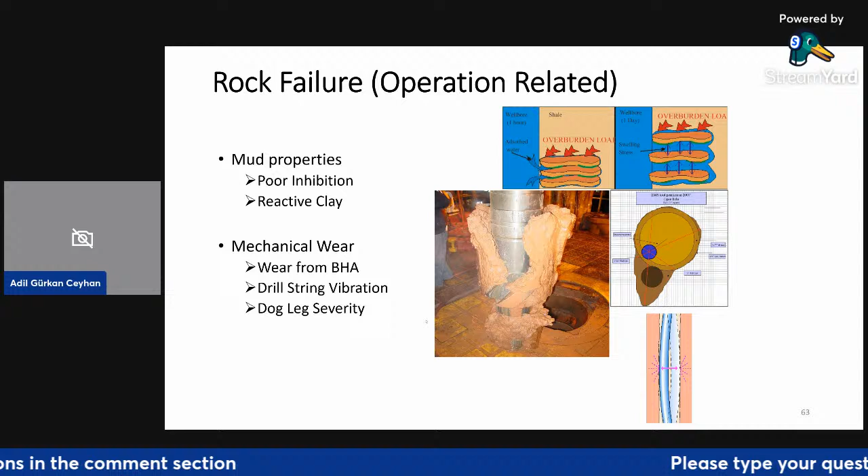For reactive clays and poor inhibition, there are stabilizers you can use, or maybe change the mud type, going to OBM rather than water-based mud.

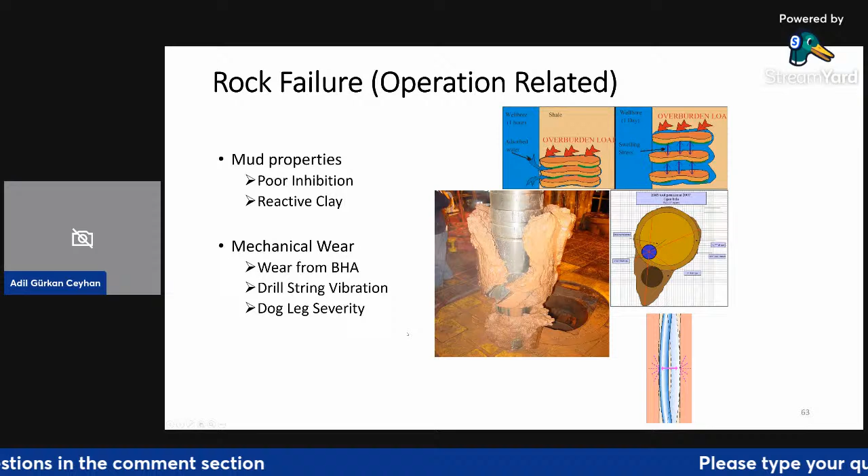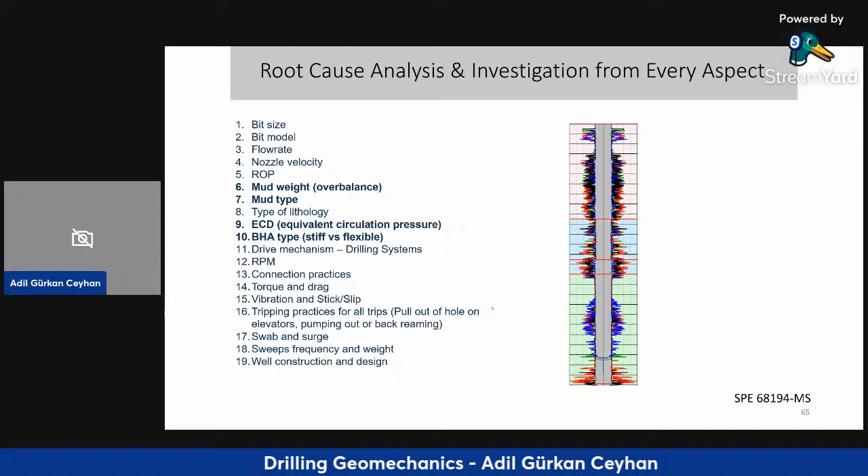As I mentioned earlier, there are things we can control and things we cannot control, but there are several other factors, which is why drilling geomechanics requires a team approach, and collaboration with several parties is a must.

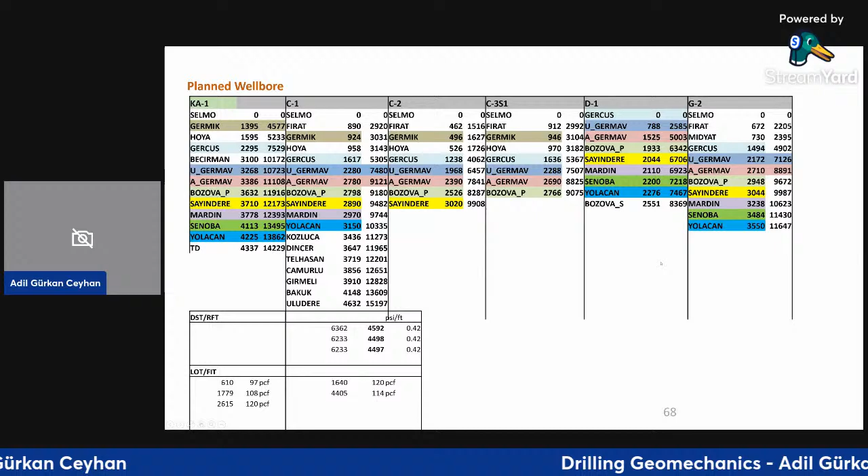We've crossed this, and we have some leak-off tests and some RFT data from the offset wells to use once you plan for a new well to drill, which is the KA1. So basically, you need to work on each wellbore offset well one by one.

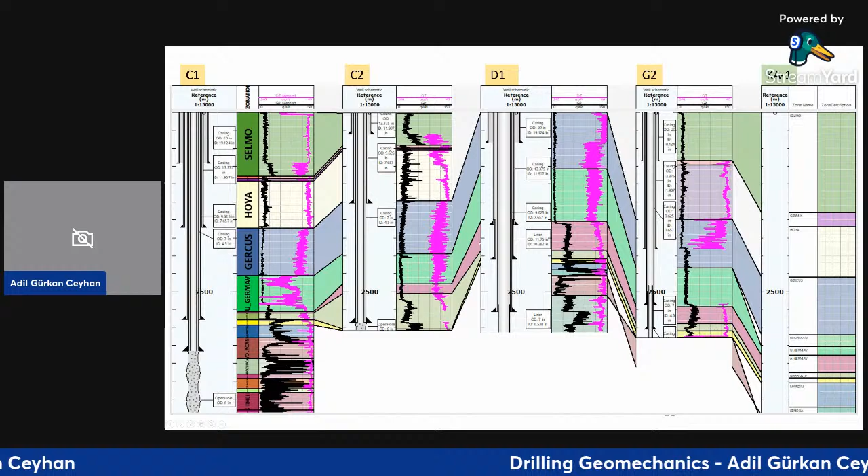So you have the logs, the sonic log, the gamma ray log, and the casing design for offset wells. This formation, due to the faulting area, has changing formation tops. Looking at the 2D seismic, it's poor here because of the geological environment, and the log quality is sometimes questionable because sometimes there are no logs.

Like in this case, because of drilling issues, there are no logs here to use. But at least there are a couple of wells with a complete set of logs to be able to use to model and predict the new well that is going to drill in K1.

So you go through the drilling history. The time depth curve is the most critical input for us. We call it all the history of that well during drilling, what has happened in each formation. This needs to be derived for each well and digested with the team to discuss what problems happened while drilling.

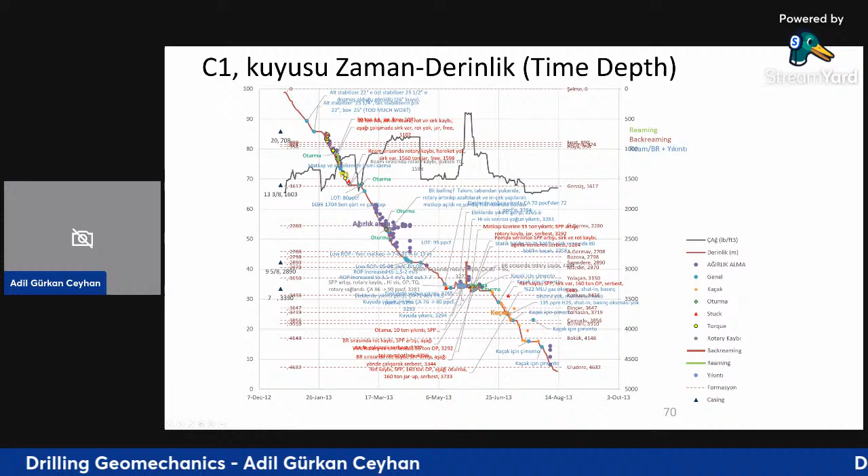Then, of course, you create a 1D mechanical model using the methodology I described earlier. Create the model across the zones we drilled and logged.

Of course, key input here is again the predictions, and this is the caliper measurements. So the prediction needs to really honor the caliper, where the failures happen, like in Gercus here in this case.

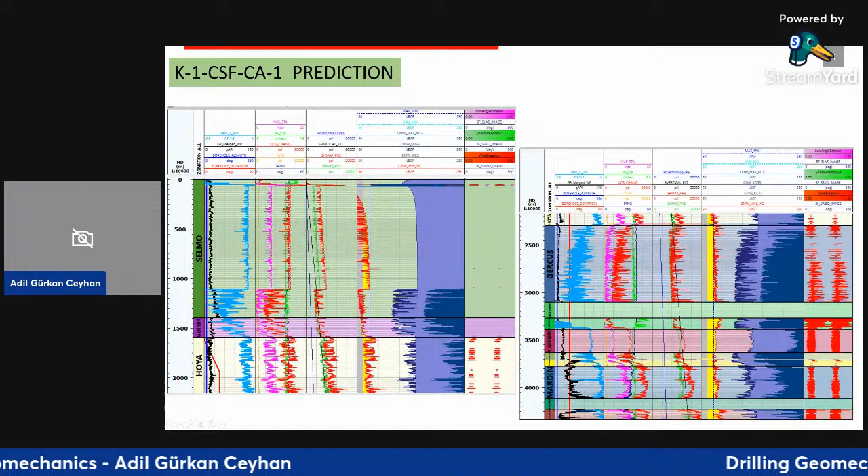Then based on this, you create a prediction model using each offset well and estimate the safe envelope, the safe mud weight envelope while drilling through Selmo, Hoya, Gercus, Becirman, A_Germav, and other formations. This becomes like a roadmap when you plan the mud weight and the casing strings.

So then you create this plot. You make a certain design based on offset well C1, you reach certain numbers, and based on C2. So for each offset well, if you have that similar type of environment, what will be your best mud weight, and what is your leak-off trend, basically where you're going to see mud losing into the formation.

Everything here is in PCF. You have to divide by 7.48 to get PPG, and divide by 62.4 to get gram per CC if you want to convert to SI units. But anyway, for onshore operations, we are using PCF, pound per cubic foot.

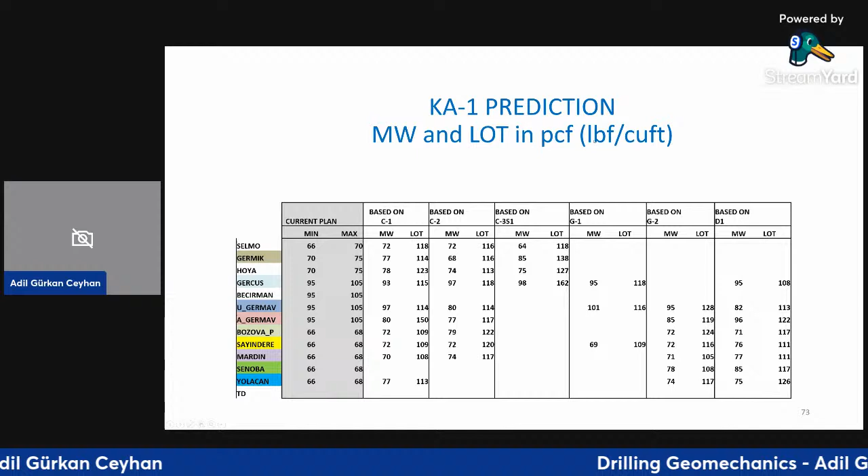So, final words. The seismic is one of the critical inputs — if it's really good, great, but if it's really bad, it gives you results that don't really reflect reality. The seismic needs to be really good so you're able to use it for pore pressure and also for wellbore stability.

Then eventually logs need to be calibrated, and you have to reach that 1D model for each wellbore, and those need to be populated in the 3D space. And of course, once you're acquiring more wellbores in the region, you keep updating your pore pressure model, the 3D cube, and then you have to initialize the stress model and calibrate all the stresses.

This starts from T1, T0, which is before production, and after production you need to forecast potential changes in the environment, fault movements, fault instabilities, compaction, subsidence. Once you have this calibration, the iteration doesn't stop — then maybe you need to acquire another 4D seismic and start from the beginning again, keep doing the cycle.

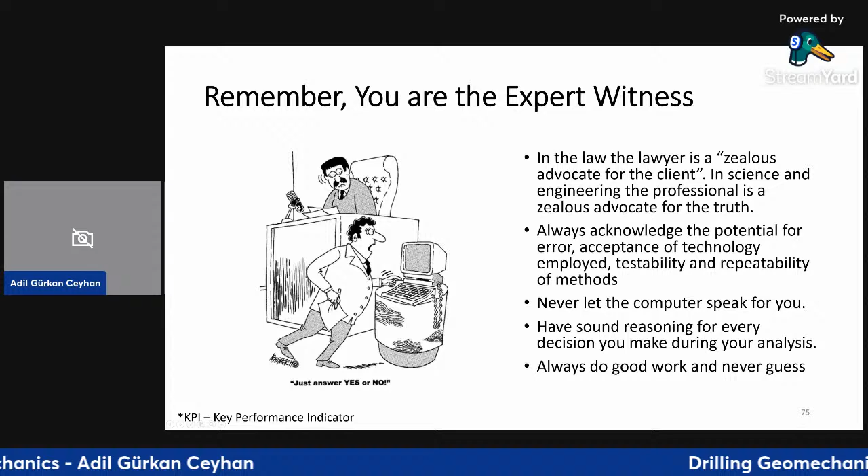And remember, the final word is...